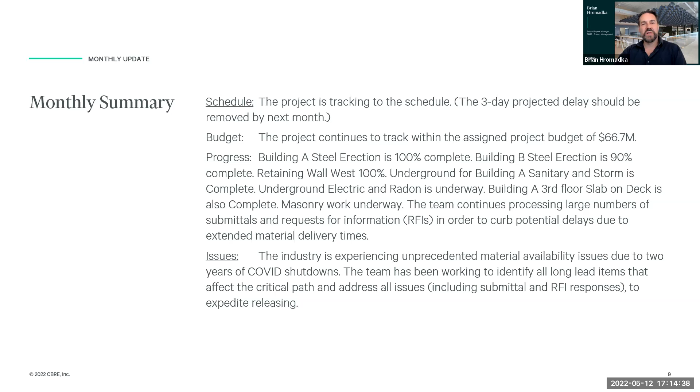So for the most part, the activities remain the same as last month. The OPM continues to manage the overall project. The architect is working now on finalizing the playground equipment. So that's something new, as well as the keying plan.

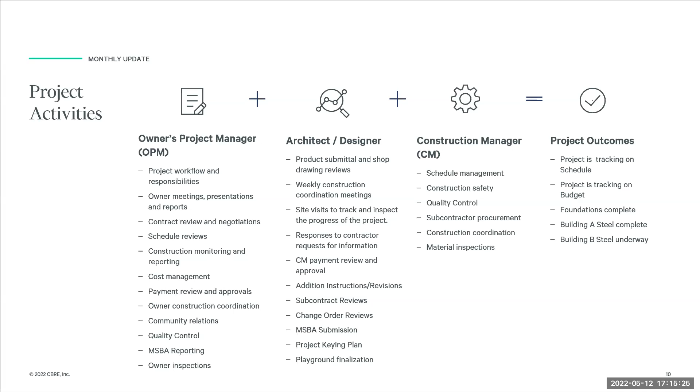We also have another MSBA submission that's being put together. That'll be the final one, so that'll be coming up pretty soon. And the CM is busy managing all the things on site, as well as a lot of material inspections lately. So together, we're able to make this thing go forward and keep the project on schedule and on budget.

And the theater drapes, we kind of had that wrapped up, but there was a last minute change. So we're finalizing that. We've got a meeting scheduled with them tomorrow.

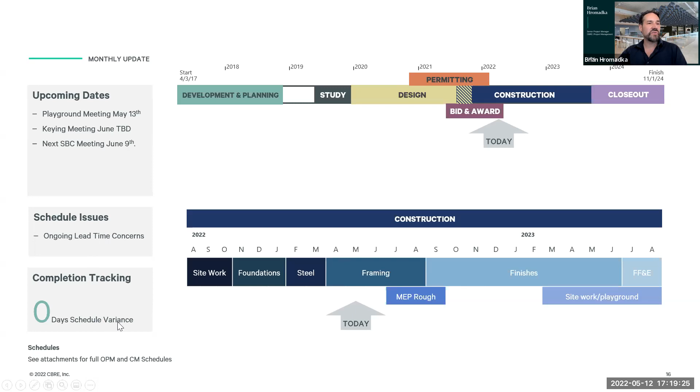OPM, like I said, there's not really much new. We're going to continue to give you these summaries in the report because it's nice to be able to pass those on to other people as needed within the community. If someone has a question about what's going on, you can just hand over that whole report. The OPM is basically working on the overall management, also communicating with the neighbors. There's some more communication that's been going out recently for some upcoming events, which we'll talk about in a little bit.

Within the next month, we're going to have a few more activities that people should be aware of. One of them is that temporary construction lights are going to be installed, probably the middle of this month, so here in the next week or so. This is necessary to provide the required lighting for the workers, now that we have all the decking in and there's more finer work that needs to get done.

OSHA has requirements for the amount of light that's necessary for the workers in order to be able to work safely. Some of those lights will remain operational once work completes in order to keep the building secure and safe. But we have been able to work together with the contractors to reduce the amount of lighting during off hours.

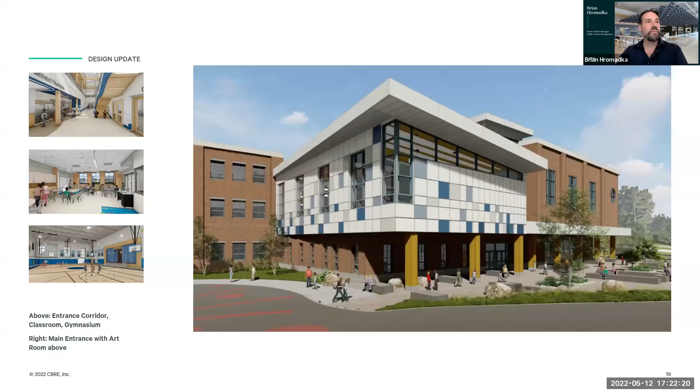Okay, moving on to our designer.

The design team has been very busy with all the submittal reviews and also answering the RFIs. Brad was able to get away for a little R&R, which was very important because he's been burning the midnight oil trying to get these turned around as quickly as possible to keep the project on schedule. We have been able to slowly catch up with the flow of new submittals and RFIs being put forth. You can see these numbers at the bottom are overall how many have been issued to date, and on the right you have the number that are open right now to be reviewed. So there's still a pile on his desk, if these were paper.

Before I move on, I wanted to bring up that we had a proprietary item for the safety glazing, and we have a substitution on that came from the contractor. I'm going to let Michelle talk about that a little bit more, but we did make a change. It's not really going to affect the performance of the project, but I'll have Michelle explain why we made that change from the proprietary item that we had previously approved to the substitution.

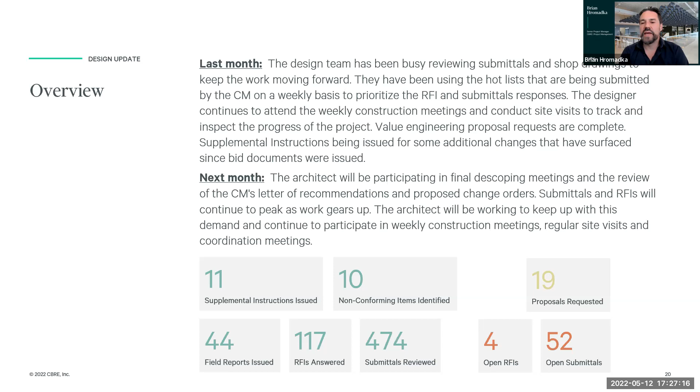Again, I can't make the technical determination, but we do look over the submittals that are processed that go from W.T. Rich to Dore and Whittier. There are many that get reviewed, and this is one of them that's been reviewed as well.

As the OPM, we participated in a variety of discussions and conversations about this. Like Brad said, we wanted to make sure we had the proper performance. At the time, you went proprietary because there was only one outfit, School Guard Glass, that made it. Since then, there are others. Based on probably three or four conversations we've had in the past few weeks, it's been made clear to us, the OPM, that from a technical standpoint, they're equivalent. So we have no reason not to recommend we proceed, especially since there's no impact to cost, schedule, or performance.

Great, thank you. That's what I wanted to get at, whether you guys have been working together on this and essentially signed off on it. Brad, you understand where I'm coming from, just wanting belts and suspenders on this. Yeah, no problem, another set of eyes never hurts.

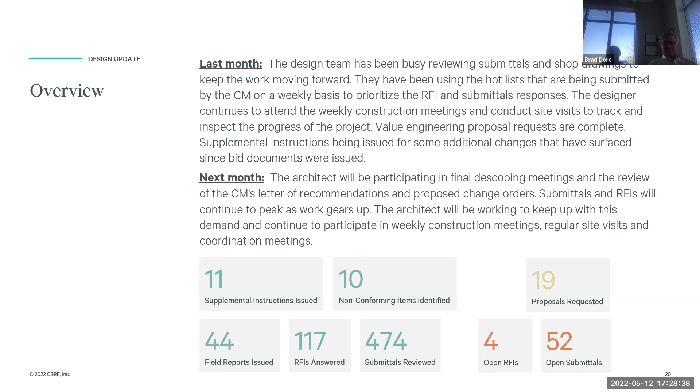Other questions about that switch for anybody? Not seeing any, thank you.

Okay, Amy is here, I believe. So we can go back to our votes. Sure, sorry that I'm going in and out, can you hear me? Yes, we can hear you. All right, I'm going to mute so you don't hear me when I'm not speaking.

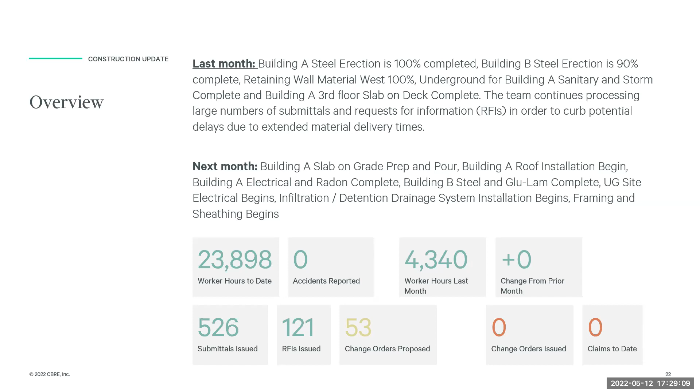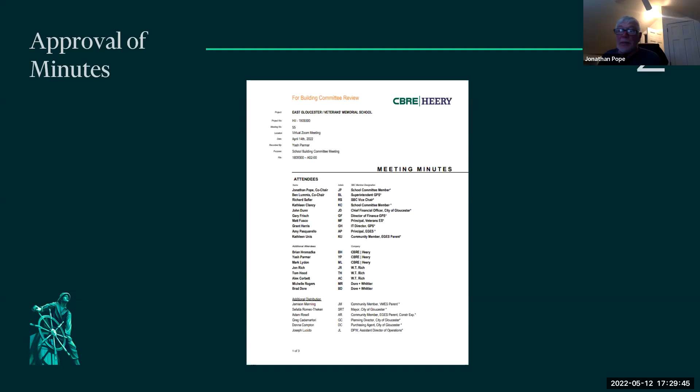Let's go back to the meeting minutes. Amy, we put out a vote for the meeting minutes and asked if there were any corrections or omissions, and started the vote, but then realized you had disappeared. So, how do you vote on approval of the last April 14th meeting minutes? I vote to approve. Okay, thank you, so it passes unanimously. We can go on to the invoices now, Brian, if you'd like.

Thank you. We have a total of five invoices this month for a total of just over $2 million. There are two of them from UTS, one from the previous month that was delayed. Then we have W.T. Rich, Dore and Whittier, and CBRE. Let me pull those up so we can go through them, and that link if you want to use the presentation. So, that's here.

Too many screens. Okay. Can you see my screen now? Great.

Okay, we'll cycle through these. Here's our invoice for W.T. Rich for a total of $2,082,959. This is for all the work performed in April. It's a little less than the previous one, so sometimes that happens even though work's been ramping up, depending on when the subs submit their invoices. There's some little variation. But this invoice has been reviewed by our office as well as the architect's office, and we are recommending approval of it.

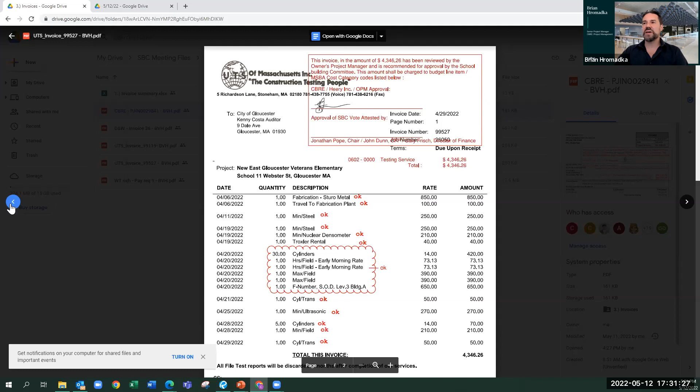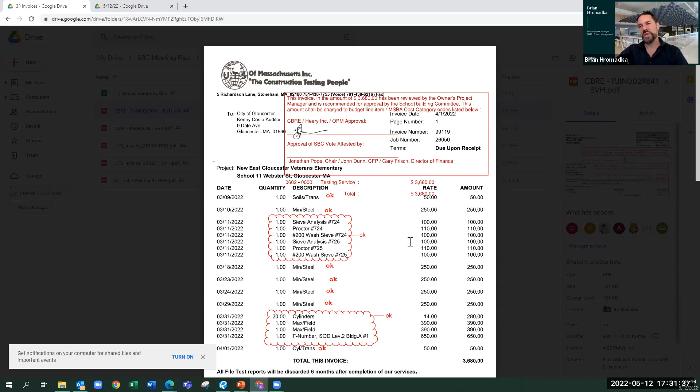Here's one of the invoices for UTS, in the amount of $4,346. And here's the second one in the amount of $3,680. Both of these invoices are for inspections performed on behalf of the owner for steel and concrete work that's been going on.

Dore + Whittier's invoice this month is for $91,645. That covers their work on contract administration. There's also some geotechnical work where the engineer was out on site and reviewed some of the samples. And then there was an invoice passed on for permitting that was back from the fall, but they just received the invoice from their sub, so that one is included for $440.

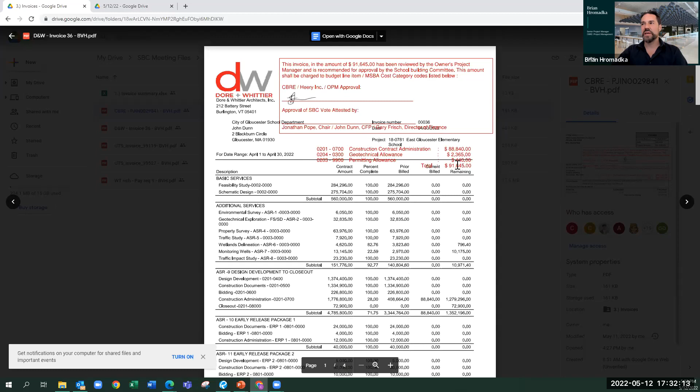And then for CBRE, we have our standard monthly billing of $60,000 for the past month's OPM services. So that's the total: 5 invoices totaling $2,242,630.26. We'd like to get a vote for approving those 5 invoices.

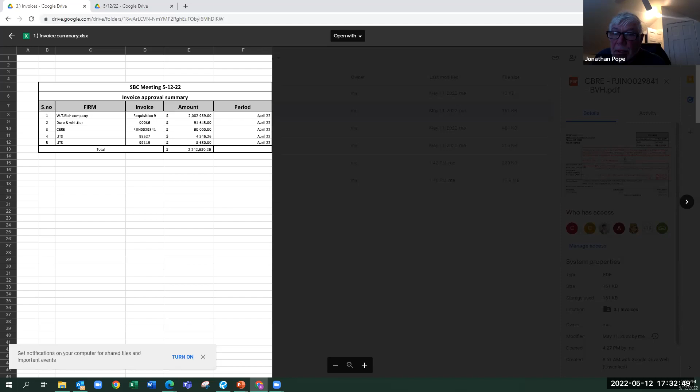Okay, are there any questions before we make a motion? Seeing none, I'll make a motion that we approve the 5 invoices as presented from WT Rich, Dore + Whittier, CBRE, and 2 from UTS, for the total amount of $2,242,630.26, and I so move. Second. Is there any discussion? Seeing none, Yash, can we have a roll call vote, please?

Jonathan Pope, yes. Ben Lemes, yes. Richard Safar, yes. Katie Clancy, yes. Gary Frisch, yes. Matthew Fusco, yes. Grant Harris, yes. Amy Pascarello, yes. Caitlin Nunes, yes.

Okay, it passes unanimously. So we can pay those bills. Is there anything else?

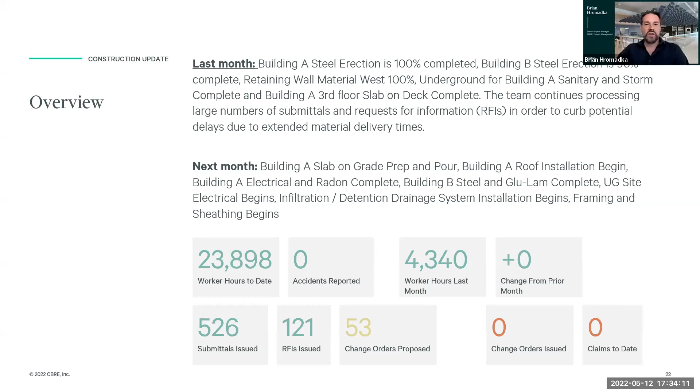Let's pick up here where we left off. Where were we? Okay, go back. So we talked about what the OPM and architect were doing, and of course we want to know what the CM has been doing on site. Can you see the screen now? I think it's visible, right?

One of the things I wanted to point out about the CM is that WT Rich takes safety on the site very seriously. I don't know if any of you were paying attention to some of the things in the news lately, but there have been a number of significant construction accidents in the region. I'm pleased to say that we have had no accidents on site. Their eyes and ears are always looking out for what needs to be done to prevent problems and make sure those are addressed ahead of time so we don't have any substantial failures. We appreciate their effort with that.

Of course, they continue to manage the overall project. You can see we've had 24,000 worker hours to date, so a lot of work has been completed. And they're also very busy with all these submittals, because they issue the initial submittal before it gets reviewed by Dore + Whittier.

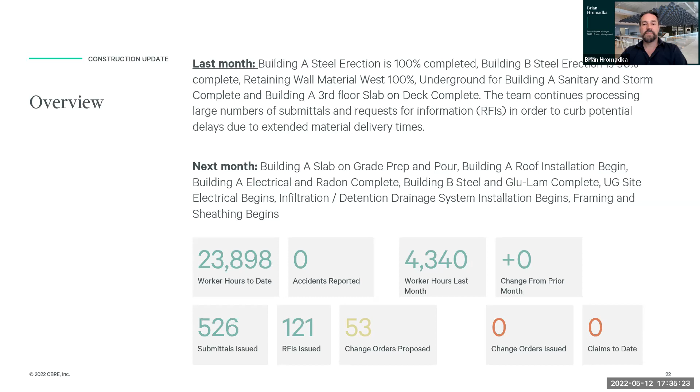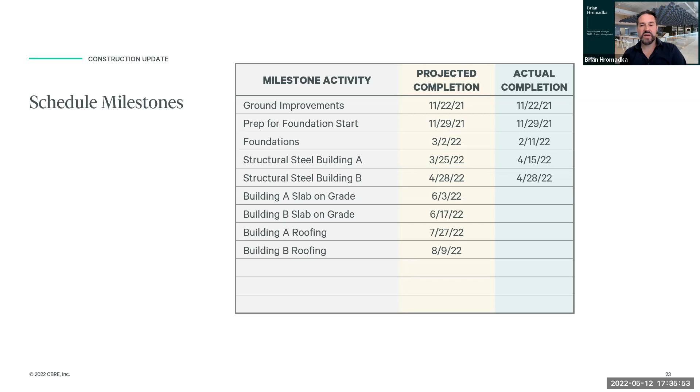Here you can see the milestone activities. We have had some slip here on the steel. You can see in building A that was completed April 15th. But structural steel for building B, for substantial completion, is showing April 28th, so that's back on track. As I mentioned before, we expect that next month's project update will not be showing any delay at all.

So here's the schedule. Maybe someone from WT Rich can take us through what we're looking at now, and then we can take a look at the drone video as well. Or if you want to talk about it while we look at the drone, I can start that.

I'll give a quick update on where we stand with schedule. We shared this last month, giving a general sense of progress as we move to substantial completion in June. Being in May, we've entered the halfway point of pouring concrete slabs. We've started the exterior building facade, getting some of the rough framing going and the installation of the MEPs.

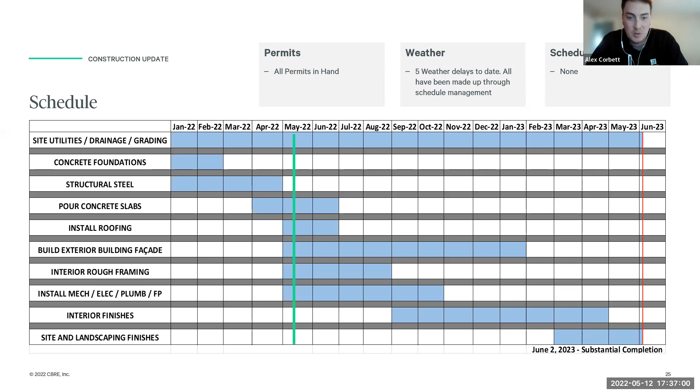We're actually, Brian, if you don't mind, Jon and I've got this new technology we want to try to roll out. I don't know how it's going to go, but we're going to give it a shot instead of the drone video, because many of you have probably seen the exterior at this point. So we're going to try to get inside the building. I need Maria to let me share my screen. I'm sorry, who needs access? Jon Rich. Okay, hold on one second.

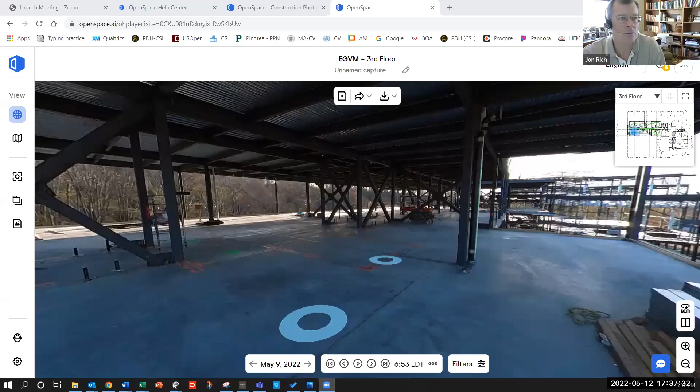So Jon's going to drive this and I'm going to narrate it. We're going to see how it all goes. Before we get into the narration, I want to mention we just started using this tool called OpenSpace. Can you guys see my screen, picture of the building?

OpenSpace is pretty cool. Our project engineer or anyone else walks the site, they do this like twice a week. They have a 360 camera mounted on their hard hat, and they walk at a fairly slow pace through each floor, doing a 360 capture of the building. It's really good data for a lot of reasons, quality control, and we can go back in time and look at things.

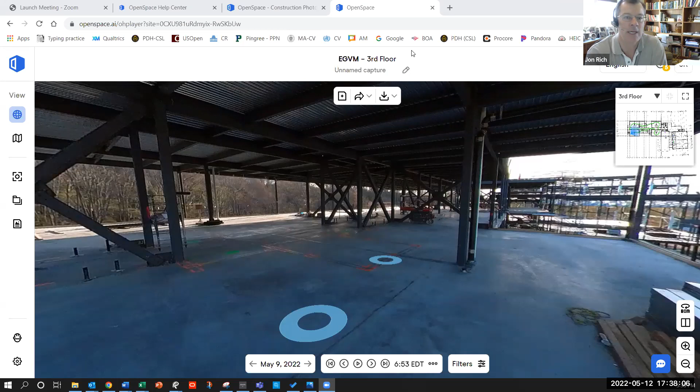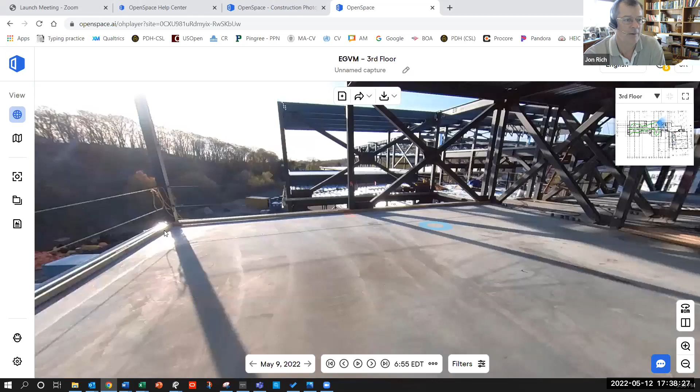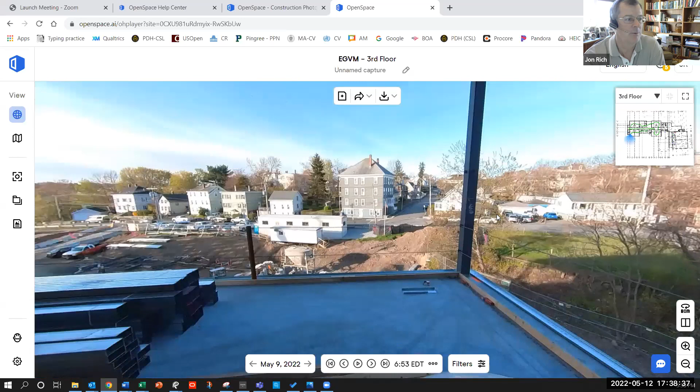So you're seeing it at a pretty early stage, but this is the 3rd floor. This is the path he walked. You can see I'm standing in this corner of the building right now, and I'm looking this way. I can jump to different parts if we want, but we'll start back here where he started. Turn around, that's looking out that way, looking at the neighbors. These little discs are capture points where you can jump to where you want to go next.

The screen kind of turns dark. You can see not that much going on in these floors, but I'll let Alex walk you through the floor, and Alex is going to talk generally about what's going on as we go. This is the 3rd floor, the west end of the building right here. Alex, you want to take it away, and I'll show whatever might be relevant.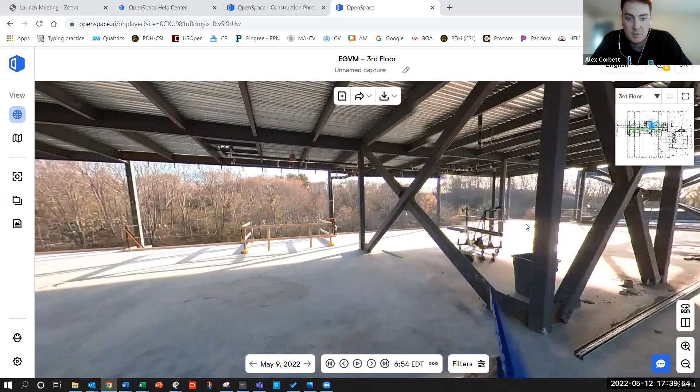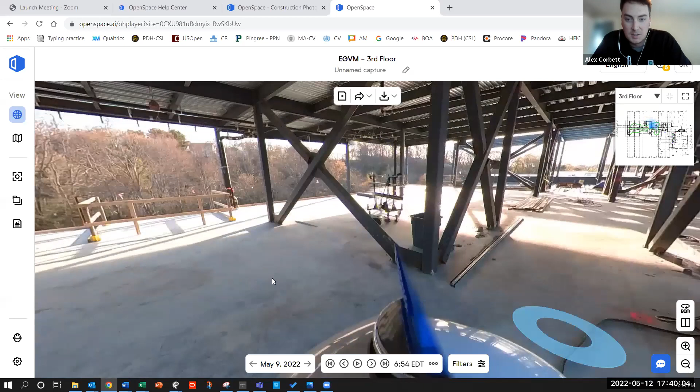They basically put marks on the ground, and then the framers will come and follow a step-by-step plan to getting the interior walls going. So you can see the enormity of some of these classrooms and spaces as laid out on the floor and then eventually framed. Right here you're at the extended learning space, which goes steel to steel. It's a gigantic space. When we jump down to the 2nd floor, you'll see a bit more of how those spaces are coming along.

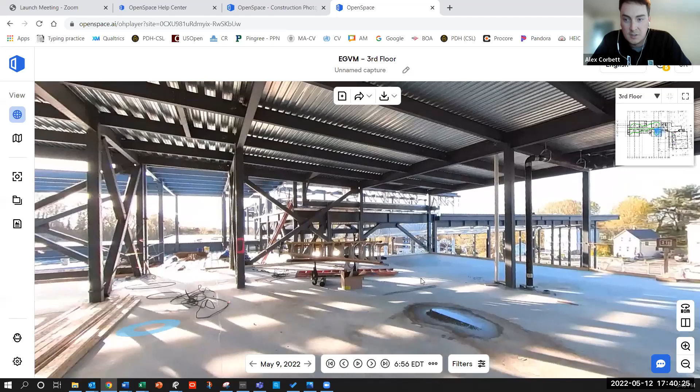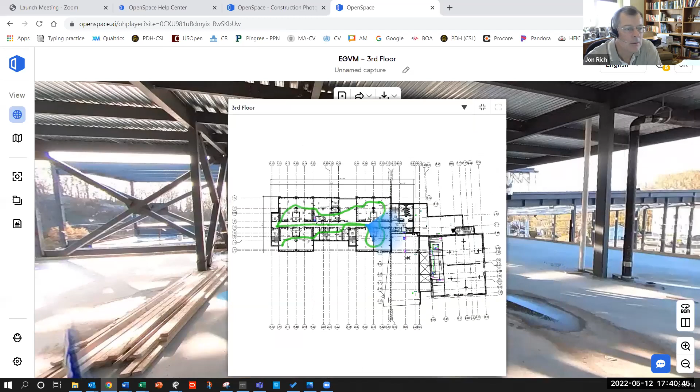Again, 3rd floor underway, getting a lot of the piping through up to the roof. You can see the white PVC pipe, that's part of our radon system carried down through the slab. You can see a lot of the rain leaders being installed as well, basically the roof drains being tied to the roof and dropped down to the slab and exiting the building. We're looking from west to east, where B building will eventually be, at the end of the corridor of A building. We didn't do a walk in this area yet because it's all just deck and not turned over to us yet.

All right, want to jump down to the 2nd floor? Sure.

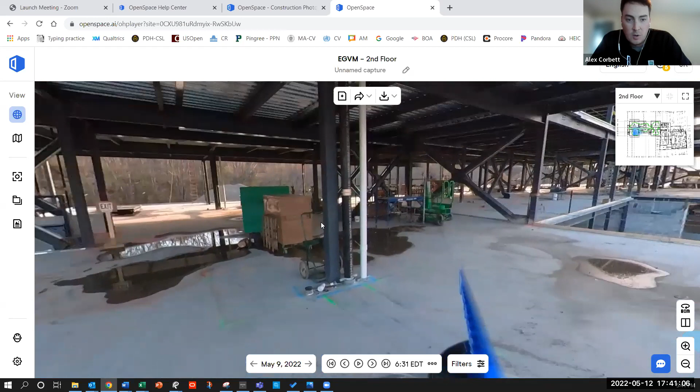Okay, let's start over here. Kind of the same corner we were before. Jon, if you want to just rotate, you can see the stairwells. They should be built up to a point just below it, so you can see the hydromobiles that are there for the masonry stairs.

This was taken on May 9th, so as of today they've surpassed the 2nd floor with their masonry block. At this point they're working their way up from 1st floor to 2nd floor, but you can start to see more of the piping through, actually making the connections with the vents and whatnot.

A little bit more layout on the ground. You can see the top tracks, which is how they start their framing. They have a lot of the top track installed at this point. We typically like to keep some of the bottom track off so our lifts can move and not damage the stud framing as it gets installed. So they start with the top track and then they'll start putting studs up as well.

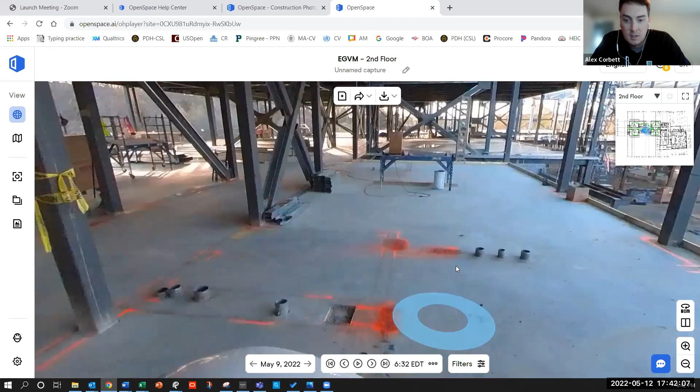So again, this is looking west to east down the corridor of the 2nd floor A building. You can see the brace frames, which get enclosed framing as well - that's part of the structural integrity of the building. A lot of the cores in the floor as well, which will get used by various piping making its way from the 1st floor to the 2nd floor.

So again, that's another stairwell right in front of us. They're creeping up from 1st floor to 2nd floor. You can see another one of the stanchions for the hydromobile. I believe that's stair 2, number 2.

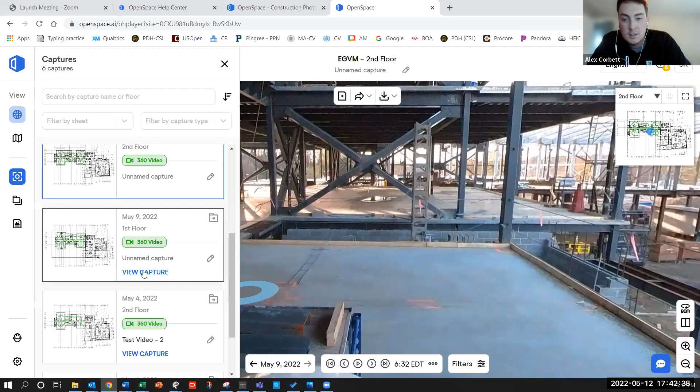But yeah, progress is going great on the second floor. I think as Brian mentioned, we've gotten studs on site as of Wednesday. So you'll start to see as you drive past this building, the building getting closed in with exterior framing. Jon's down to the first floor at this point.

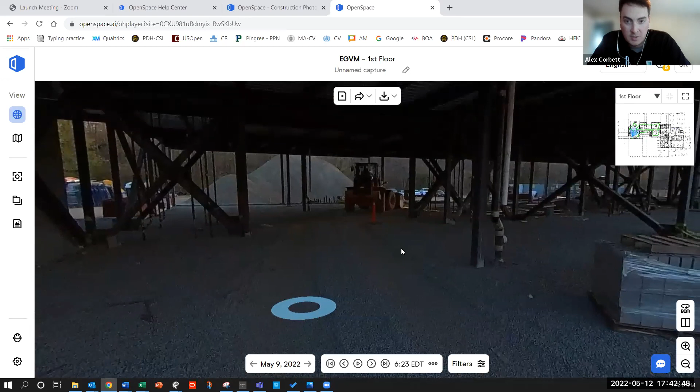As we've mentioned before, a lot of the underground MEP stuff below the slab's been installed at this point. As I mentioned, all those rain leaders are tied in through the slab and exiting the building. So you can see that stair 1 shaft being built.

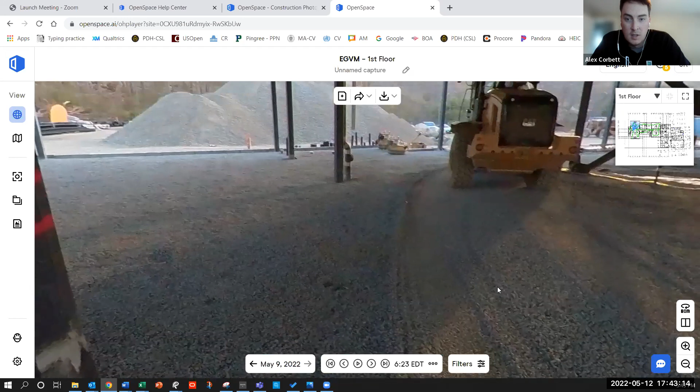You don't see a lot of stuff on the ground because it's all been covered by crushed stone, so we're actually in really good shape. As Brian may have mentioned, we're preparing - next week we'll start getting the rebar in, a lot of the mesh as well, preparing to pour the slab on grade on, I believe, May 26th is our target date. So we're in really good shape there.

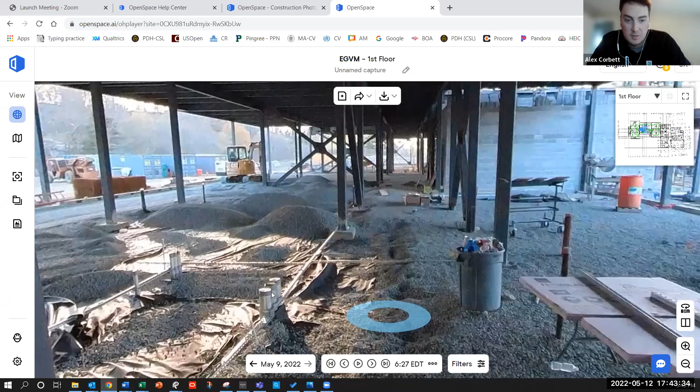You can see some of the guts, if you want to call it, under the slab there. That's the electrical room, which has some of the larger feeders, feeding that space as a secondary electric room in A building. You can see the stair 2 shaft as well.

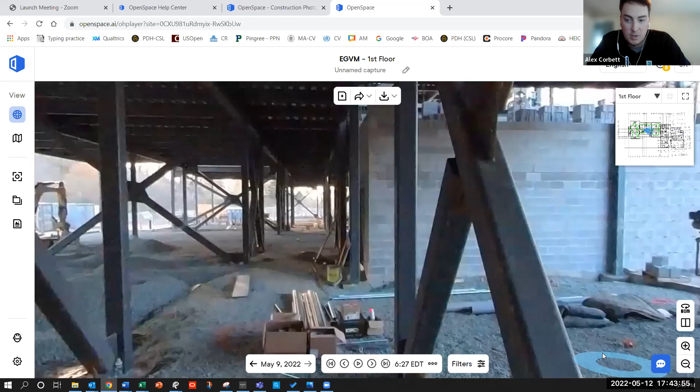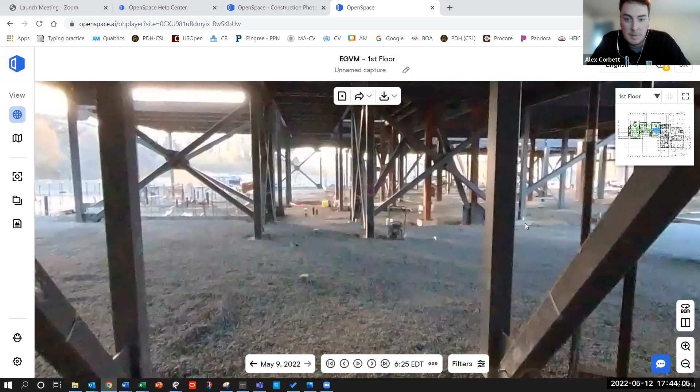So yeah, it's pretty amazing to see - this was 3 days ago, and if we were to go to today, just the amount of progress that's taken place since. We typically do these OpenSpace shots twice a week, so if we did this on May 9th, we'll probably do one either tomorrow or the beginning of next week, depending on how many we've done so far.

So we wanted to give you guys kind of an insight into the interior of the building, since most of you have seen the shape of the exterior with the drone video and whatnot at this point. So I'd be happy to answer any questions you guys may have.

Just one thing I'm going to point out, as the OPM looking at this, it's pretty impressive because a picture's worth at least 1,000 words. But also by having this level of detail being shared with the committee and the public, WT Rich, generally, because I've worked with them on a number of projects, keeps a pretty clean, orderly site. I would think that by having this technology, it's going to even increase the likelihood that things will be kept neat, clean, and orderly, which helps with safety and the overall production of the project. And when people see this, you'll really appreciate all the work that's going on and seeing the difference between what we'll see next time versus this time.

You'll be able to see the incredible amount of work that gets put in place by maybe 100 or so workers each day. Not 100 yet. I would just say also, Mark, this OpenSpace tool is great for just doing little virtual tours of where we're at now.

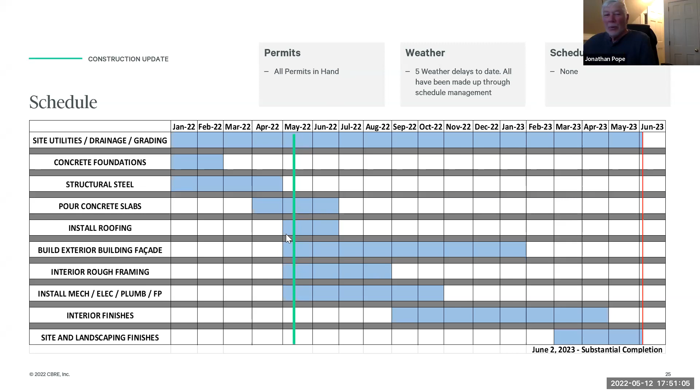Okay, let's keep moving here. Landscape, you can see this now. This is where we left off with the schedule. We won't play the drone video since we got good coverage there.

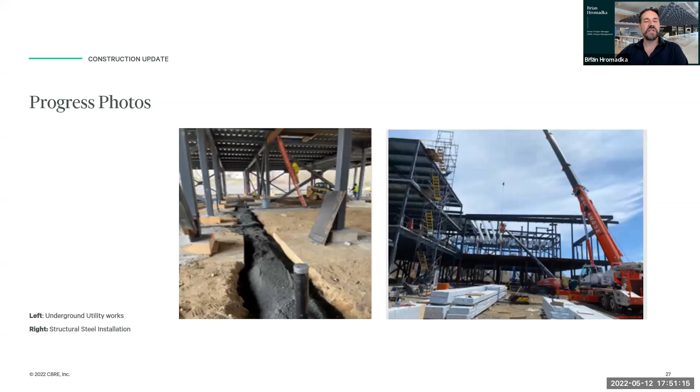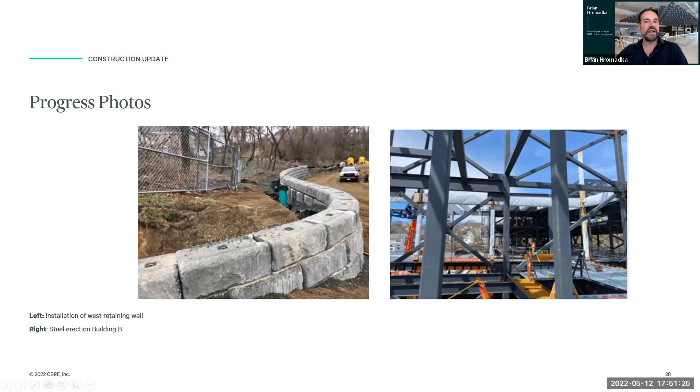Okay, a few more things we wanted to cover. Landscape boulders - we made the decision to bring in some landscape boulders to the front of the building. This was something that was originally cut out of the project, but we had an opportunity. Dennis had noticed when we were excavating, we've got all these big boulders - maybe we could reuse some of them.

The good news here is that the cost to bring in new boulders, which is what we originally had in the project, was about $100,000. So by being able to salvage these boulders to use at the front of the building, we were able to save money in two ways. One, we cut down on the cost of having to remove those boulders, because otherwise they would have to be jackhammered apart and then hauled off site. And then, of course, now we didn't have to pay for new boulders. So overall, we saved about $70,000 on this $100,000 item. We're happy to be able to share that with you.

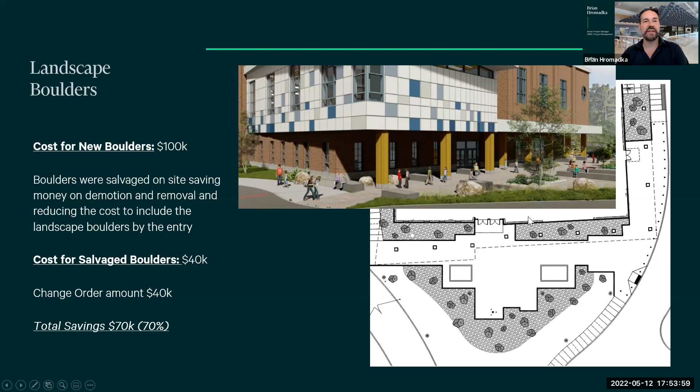One similar item for some additional cost to the project, but something that provides an incredible amount of savings overall, was we looked at adding some additional conduit for future electric vehicle chargers. We've all seen more and more electrical vehicles as we drive around our area. We have 2 vehicle chargers, that's what you can see here on the plan, that are currently part of the project. We could accommodate a total of 6, so 4 more, with the current conduit. But because of where we are right now in the project, the cost to add that conduit is quite minimal.

It'll be around $2,000 to $3,000, whereas if we were to do this after the project was completed, we'd be looking at about $20,000. So by going ahead with this now, again, the timing is key, because if we miss the timing now, we miss that opportunity. We can get the necessary conduit in place so that the project could accommodate up to 12 electric vehicle chargers, and we'll be saving about 85% of the cost on that. So again, that would be a change order to the project of about $3,000, but with those 2 things combined, we feel like we can still be responsible in handling the budget and execute those 2 changes.

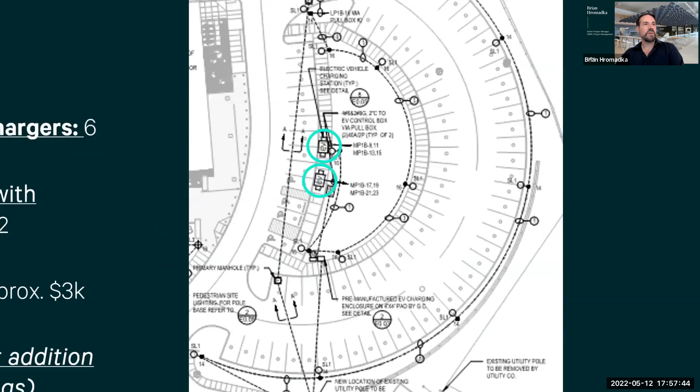I guess the question is, the EV chargers, we're installing 2 of them, got that. And those are staff parking, visitor parking, they could be either or. What's the intention there, do you think?

I actually don't know what the signage is yet. I don't know if we figured out exactly which ones are gonna be staff, which ones are gonna be visitor. That's something that could still be figured out. But we do have 2 available that could be used for either one of those purposes. And both with the existing and now also with the new, we can have up to 12 chargers. So if the city wants to put more of these electrical vehicle chargers on site, we could accommodate more so that you could have some for staff and for visitors that are separate.

I really like the idea of adding them, especially now, it's obviously less expensive to put them in there, they're there for when we need them in the future. I guess what I was thinking is, there's a whole bank of parking spaces in the front dedicated to electrical vehicles and no one's using them. But if I think through it, we actually don't install those additional chargers until there's a real demand for them and we've gone electrical vehicles in a major way. Is that more of the thinking?

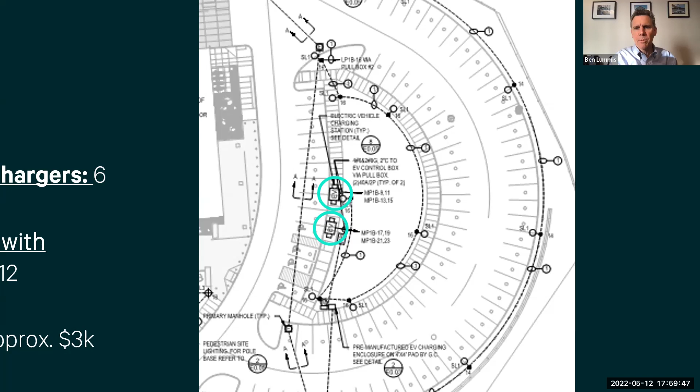Any thoughts on that from people? Let me give you a couple thoughts - so one, just so everybody understands, those 2 chargers are actually 4 stations, it's two per, so you have 4. And the idea was to just put in that initial infrastructure, that underground infrastructure that gives you the flexibility to do some of that later.

There's more work that'll have to get figured out with the utility company, because depending upon how many get installed, there may be a need for a transformer there - they do need to be connected, so to speak. But I think the important part is to at least have, at a fairly low cost, the ability to put that infrastructure in now versus later. Then, at the point in time when it's the appropriate time to pull that trigger, you're able to do so without having to rip everything up and replace it. So there's some more work to be done here, but for fairly low cost, you can save yourself a lot of money going forward. That's really the intent here.

I have to point out, it was Brad, I think, who mentioned this first, that it would be a good thing to add into the project at this time. So he was thinking ahead. I don't know if you have plans to get an electrical vehicle, Brad, but I don't know if they make big trucks like that now, but maybe in a few years. There's always hope, Brian, there's always hope.

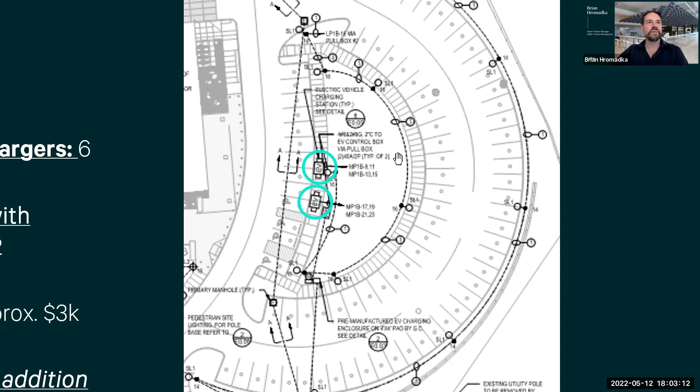Well, you do have all these parking spaces here, which is not much further distance to get, and this is, I think, a landscape area. Yeah, so that's something I think that probably could be accommodated, without having to go all the way around to these spots. It's a good question, like you say, maybe instead of having them all right up close to the building, we can take this second set that we're talking about for the future and maybe do them on the right side of that detention area. Yeah, I think that's exactly the way Kathy and I were thinking.

I love electric vehicles, I would like to get one someday, but that doesn't necessarily mean that I get premium parking reserved for me everywhere I go, right? But we want to have them available, we definitely want to have them available. We want to build infrastructure to have more as the future goes along. So let's take a look at that, and maybe we can report back to you guys on it. Conduit's relatively inexpensive, so let's take a little look at that and see what we can come up with.

I think it should be premium parking for people with electric vehicles, just for the record. Fair point. Very biased, really biased.